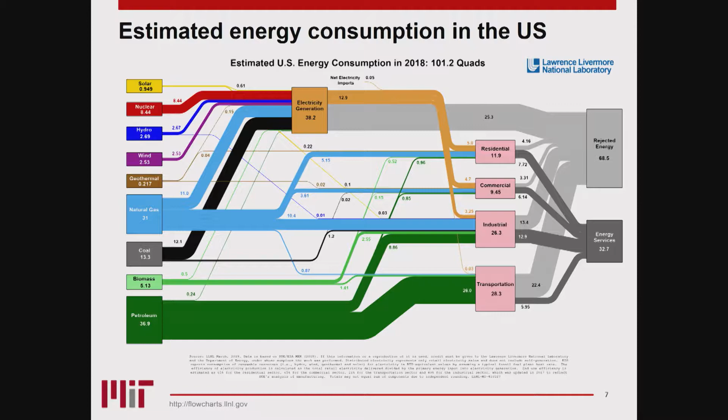I couldn't find one for the world, but if anybody knows of one, I'd be happy to put it into the presentation. How many people have seen a graph like this beforehand? Okay, a few people. So for those of you who haven't, you want to read this left to right. On the left-hand side here, you have your estimated energy consumption. These are energy resources, essentially where we harvest energy from.

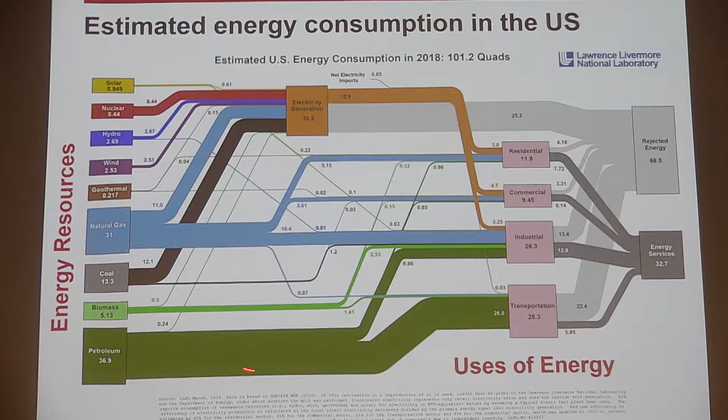And you can see on the bottom here, petroleum, biomass, coal, and natural gas. These are all sort of fossil fuel resources. And then geothermal, wind, hydro, nuclear, and solar we call more renewable type energy resources, right? And as you see the flow, the thickness of the arrow determines how much of that resource is going to a particular application.

And so in pink here, you have the uses for energy. So residential, powering homes, powering our businesses, so commercial and industrial, and then also powering transportation. So this is cars, trucks, and vehicles such as that. So these are the end uses of the energy.

And then the darker gray and the lighter gray represent the efficiency of the use. The darker gray here is energy services. That's energy that we actually use to produce useful work. And the energy in the light gray here is the energy that is rejected. That's energy that we lose in the transformation to heat or to some other losses, right?

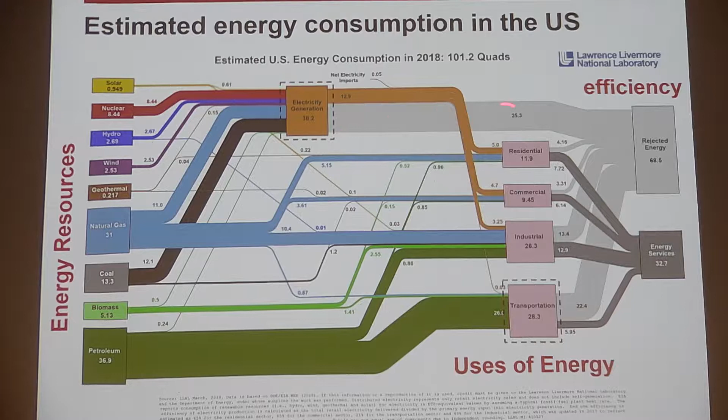So the important thing to take out of this, I think, is that, one, we still use a lot of fossil fuels here. These amounts of energy are significantly more than any of the renewables. The second is that particularly for things like electricity generation and transportation, so driving cars and trucks, you can see that a lot of our energy here and over here is rejected. Essentially, it's not a very efficient process. We're only able to use a fraction of the energy going in.

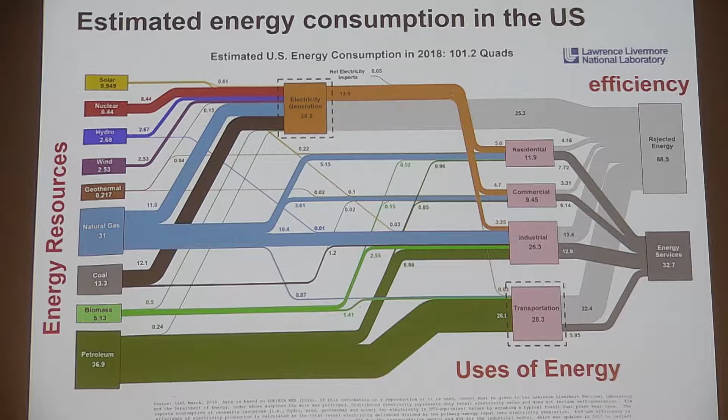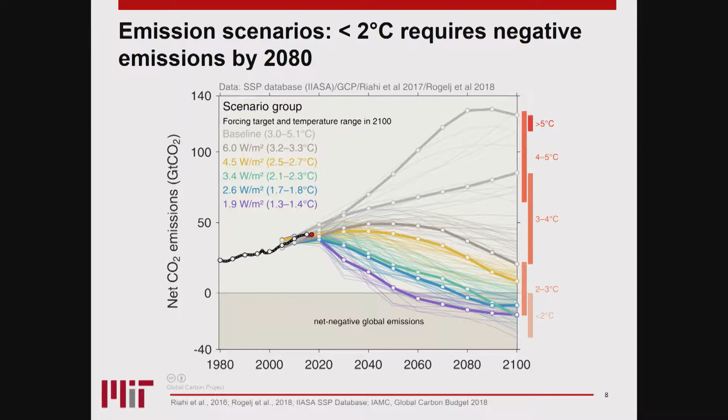And this then becomes a problem because if our energy use is not efficient, you need to use more energy to complete a particular task. And where this becomes an issue is when you start to think about emission scenarios with fossil fuels. Fossil fuels generate carbon dioxide, and the carbon dioxide, as it goes into the atmosphere, can then lead to changes in the global temperature.

And so these are now projections from the Global Carbon Project here. This is sort of when the data was taken. And these are projections for business as usual cases and sort of the increase in global temperature. And then opportunities for us to begin to reduce emissions to the point where we go net negative around about 2080 or something like that. So obviously these are very aggressive.

But you can notice for these kind of projections, in order for us to keep emission scenarios below 2 degrees, you're going to have to do some pretty drastic changes in the way we do business right now, including not just preventing net emissions, but then beginning to reduce it until we start to pull carbon dioxide out of the atmosphere. So these are fairly significant challenges that we're facing.

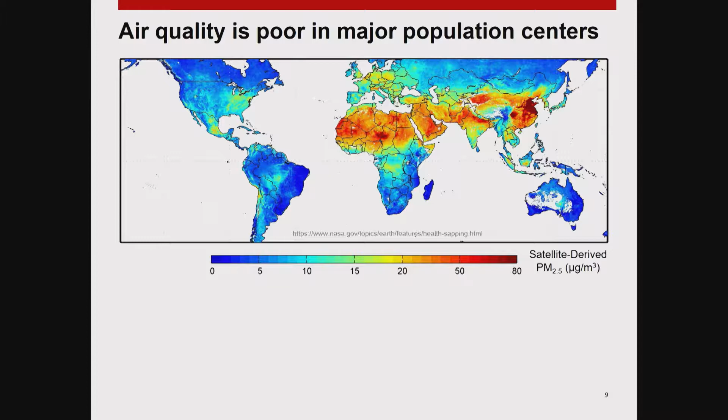And I'll put another challenge closer to you guys' heart, perhaps, is that if you live in a city, anytime you're combusting fossil fuels, you're pulling out CO2, but there's also a whole bunch of other stuff that comes out with it as well. And so air quality in population centers is actually a fairly significant problem. And so poor air quality becomes an issue as you have urbanization, people moving to the city, improvements in middle-class livelihoods.

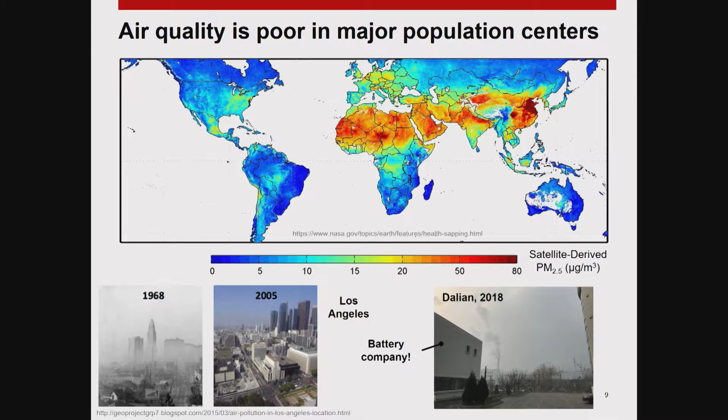And things are changing. The reason I'm in Dalian is I'm at a battery company. This is a battery company right here. And so they're working to address some of this smog right here. So we can see that the changes are coming around the world. And so I want to leave you with something today, if I can, is that it's all connected. So a lot of times when we think about energy storage, we think about a particular application, or we think about a particular type of energy storage. But everything is connected together.

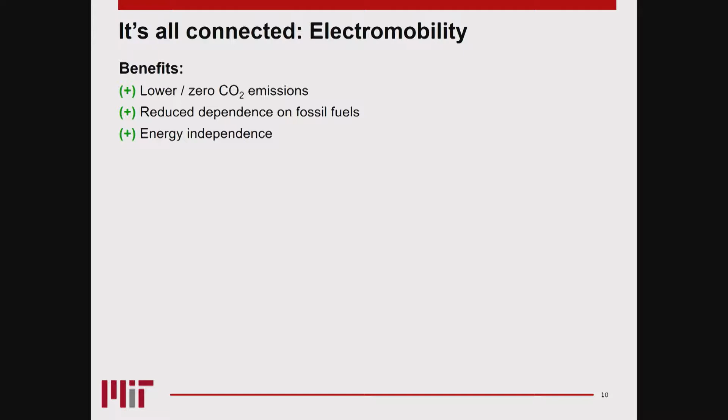And so, for example, if you consider electromobility, which would be electric cars, electric scooters, we think, oh, it'll lower CO2 emissions, we can reduce dependence on fossil fuels, and we can maybe achieve energy independence, not having to import fossil fuels from different countries. But it's all connected. So if you take this car, this Tesla right here, the Tesla gets electricity because you plug it into the wall.

Where does the electricity come from when we plug it into the wall? It comes from some generation source down the road. It could be a power plant. It could be a thermal power plant powered by natural gas, coal. It could be a nuclear power plant. It could be renewables. And so where this all comes from matters, because if I have electromobility with a car that doesn't emit CO2, but I've simply shifted those emissions upstream now to a power plant, I haven't gone anywhere. I've just moved where the emissions are coming from. And so that actually doesn't solve the problem.

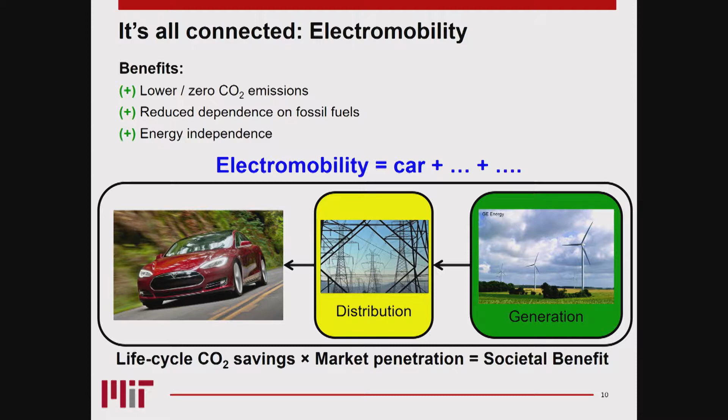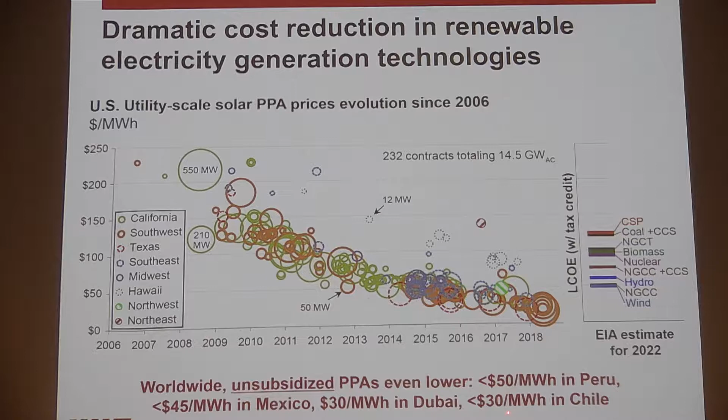And as you can imagine, worldwide, there's lots of places where solar makes sense. Sun-soaked places like Peru, Mexico, Dubai, and Chile all have very, very low costs of solar electricity. This is like 3 cents per kilowatt hour here. So very, very cheap, and we anticipate it getting even cheaper. OK, that sounds great. What's the problem? The problem is the variability. As you know, the sun rises and sets, and if I needed to turn on the lights at night, there's going to be no solar power available because the sun's gone down, right?

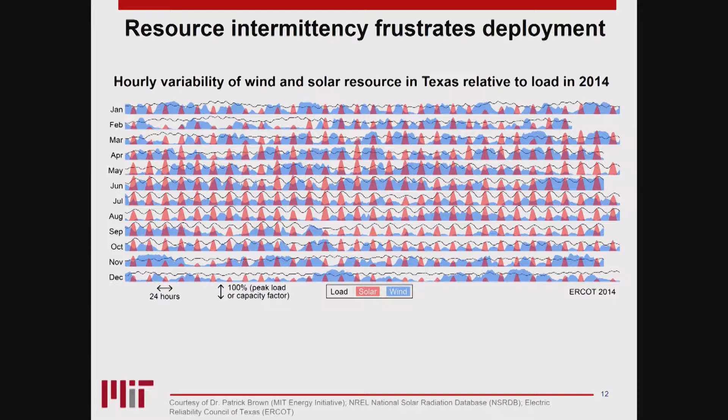It's a little bit more complicated than that, though. What I'm going to show you here is hourly variability of wind and solar resources in Texas. This is data from Dr. Patrick Brown at the MIT Energy Initiative. And this is data for an entire year, 2014, in Texas from the Electric Reliability Council of Texas, which covers the majority of the electricity consumption in Texas.

What you're looking at here is this black squiggly line that you can follow from month to month. That's the load, the amount of electricity being used by the system. And the red bumps here represent solar. Each of those bumps is a day, right? So you should see enough days for the month and enough days for the year. And the blue, say, amorphous blobs are wind availability, right?

So I want you to notice a couple of things here. One, of course, we can see in the days the sun rises and sets, and in some cases, let's say the 1st of January, there's just enough solar available to power the load, right? But in many cases, there's not. The second is that at nighttime, when we need to use electricity, there's no availability of solar, and sometimes there's no availability of wind. This is another example right here where for a couple of days, we don't have enough solar and enough wind to power ourselves.

You can also see that there are places, let's say this week here in February, where things are not looking so good for renewable generation. And you can even see here in December, this doesn't look so great either. And finally, you can see in the summer things look a bit better, but in the winters, things don't look as good.

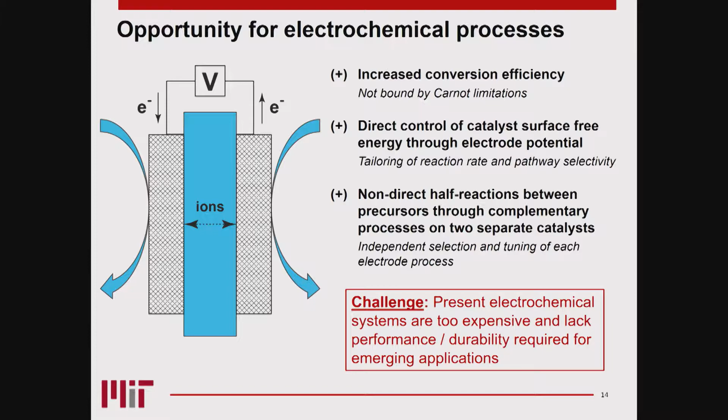I have direct control of the catalyst surface through basically modulating free energy by changing electrode potential, and I can independently specify the different electrode reactions. All of this gives me a nice tunable system with which to design new reactors and new performance. The problem is that these systems are too expensive and lack the performance and durability for many of the applications that I'm discussing with you today. A lot of you are very familiar with these kind of systems, and I'll talk about a couple of examples, but we'll get back to the fact that this is not what we want for tomorrow.

So for those of you who are interested, though, I told you that you don't necessarily need to be a chemical engineer to do this kind of stuff. For electrochemical processes to work, we need a diverse group of scientists and engineers because we need to synthesize and characterize new materials. We need to have good understanding of the thermodynamics of the process, of the reaction kinetics, how it actually operates, transport phenomena between the two electrodes, as well as reactor design and prototyping. So it requires a diverse skill set.

And for those of you who aren't interested in any of that, also things like estimation and approximation, modeling and simulation, process optimization, and engineering economics all play a very important role in effective system design. So you can imagine that it's very difficult for one person to know and be expert in all of these things. You need teams of people focused on these types of problems.

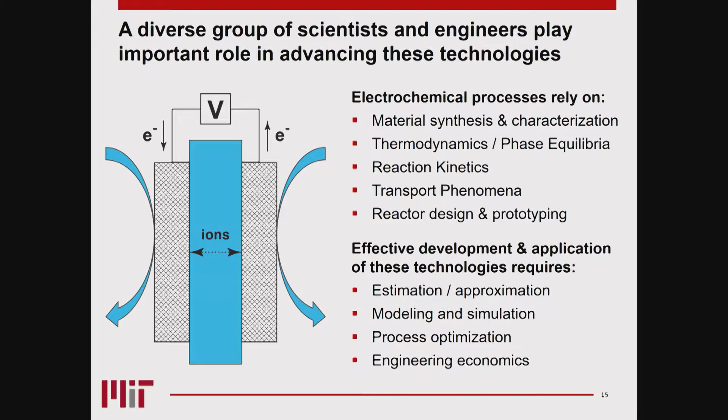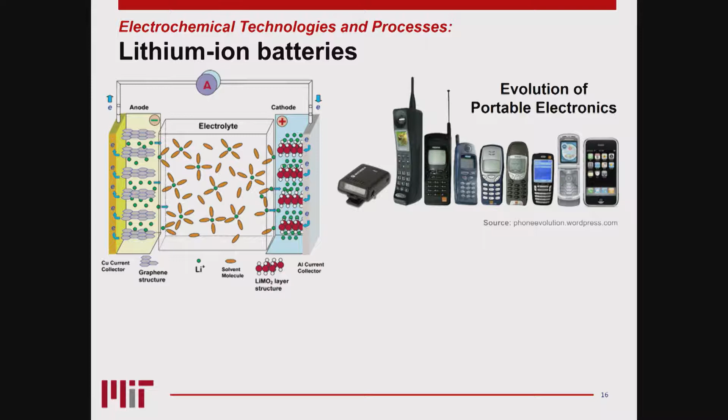All of that requires more power, which requires increasingly powerful batteries, increasingly powerful systems that we're working on today. Going beyond portable electronics, we want to be able to use lithium-ion batteries to power vehicles. This is an example of the Tesla that I showed you a bit earlier. And even to power and enable the renewable electricity to come on the grid, using batteries to prop up the intermittency of renewables, where you store electricity when you don't need it, and then you can deliver it onto the grid when you do need it.

So lithium-ion batteries are a core technology, and they're ones that hopefully you're familiar with, but there are many others that are equally important that you might be less familiar with. For example, anytime you're dealing with an aluminum can, say if you're drinking Coke, I don't necessarily like Coke, I'm fine with Pepsi too, I just found Coke first.

So those come from aluminum smelting plants, where you take bauxite and you reduce that to form metallic aluminum, and the metallic aluminum is what we use to design aluminum products. An important thing to realize is that this is a very energy-intensive process, which is why recycling is such an important part of aluminum. It costs a lot of energy to be able to make these types of systems.

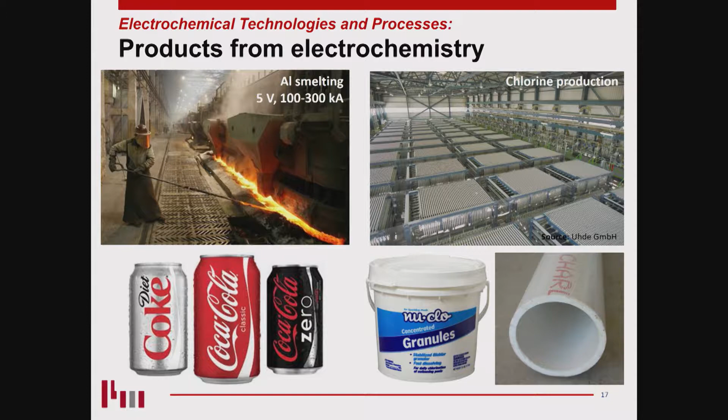Also, chlorine production. If you go to a pool, any sort of a pool has to have chlorine in it to keep it disinfected. And a lot of piping, this is PVC piping, involves chlorine. And that's also synthesized by an electrochemical process on an industrial scale.

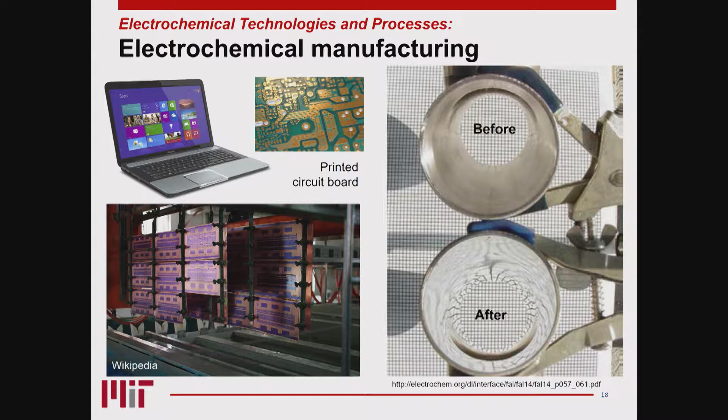Within your computer, it's not just your battery that requires electrochemistry. A lot of your printed circuit boards are printed via electrochemical methods. You're printing all of these circuit boards that will then go into this computer right here, as well as a lot of metal components here. This is electrochemical finishing, where this is the before system, and after electrochemical treatment, you can see it's significantly more shiny. So this is a way to finish products in different processes that can then be used in complex systems.

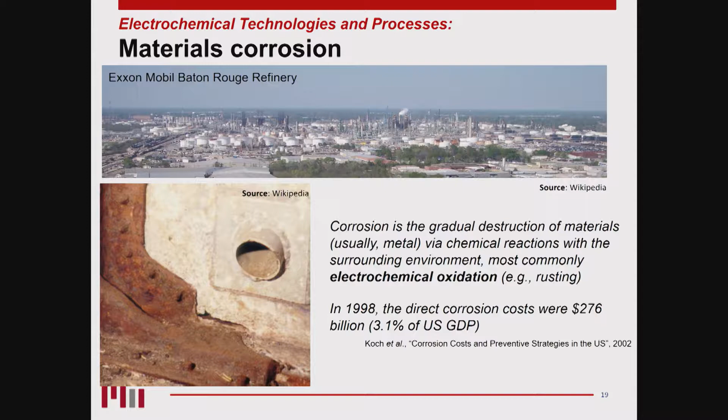And then finally, materials corrosion, which is essentially something that you don't want, but what happens over time is metal components, when they're exposed to the environment, will gradually oxidize, and this is how you, say, form rust. And rust leads to failure in these types of systems. So this is an example of the ExxonMobil Baton Rouge refinery. All of these components are metal.

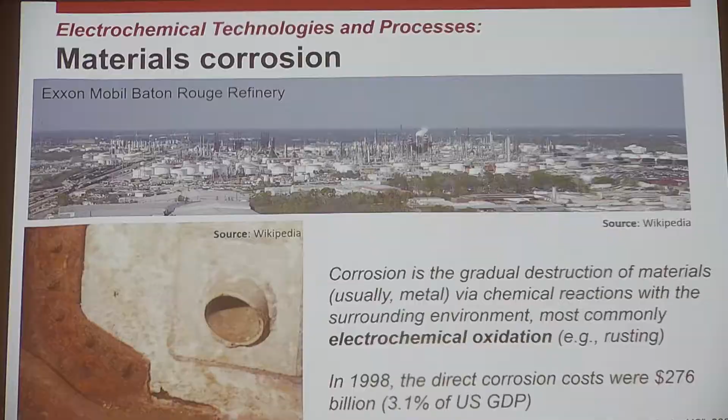They're really worried about corrosion, and this number is a little bit old, but corrosion was about 3.1% of US GDP in 1998, so obviously that number is going to be a lot higher right now. It's a big, big problem. If we could figure out ways to prevent corrosion, we would save a ton of money and improve energy efficiency quite a bit. So lots of things to think about here.

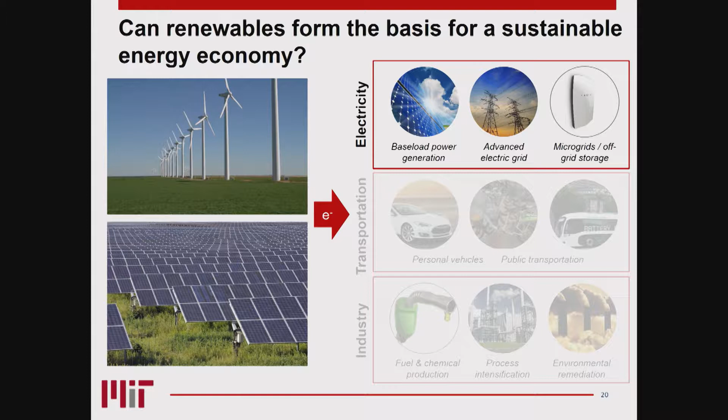So with the remaining time that I have here, 10 minutes, I want to give you a little example of some of the work that we do. And I start off by saying that for all of this to work, we need to be able to get renewable electricity and deliver it to the grid in a reliable fashion, for us to then enable transportation and also enable industrial applications. So what are we doing in this space?

So how many people know how we store electricity on the grid these days? Yes, over there. Spinning generators. Yes. That's one example, a spinning generator. It's called spinning reserve, and when you have voltage that's dropping off, the reserve kicks in and provides a little bit more punch. That's really useful for, say, sub-second to second type applications. That's right. Yes? That's exactly right. That's on the other side of the scale. So spinning reserve is for short-term issues. Hydroelectric and dams are for long-term applications.

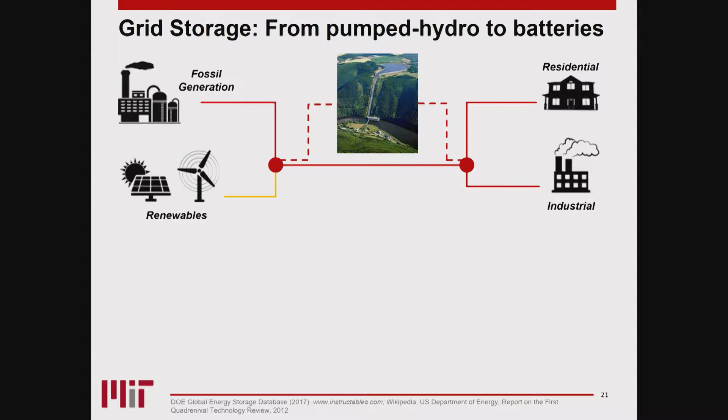So to give an example of the hydroelectric, essentially what hydroelectric is, you're storing water at two different elevations and taking advantage of the changes in potential and kinetic energy. So when I pump water uphill, I increase its potential energy. If I let it flow back down, that potential energy is converted to kinetic energy. That kinetic energy can then be used to power a turbine. That turbine can be used to generate electricity.

And so I use electricity to power the pump to go uphill, and then I let it flow back downhill, and I use the turbine to generate electricity. Right? This makes a lot of sense for a lot of different reasons. One is because water is a very, very cheap form of energy storage. We have a lot of water around.

And if you can take advantage of natural resources, so this is Lake Michigan here, this is in Ludington, Michigan, you can basically store energy in these pools that are slightly elevated from the lake and allow them to flow down through the generators right here, and this allows you to generate power. The nice thing about this is if I need to store more energy, I build a bigger pool. If I need more power, I build out another turbine. But you don't need to do both. It's one or the other.

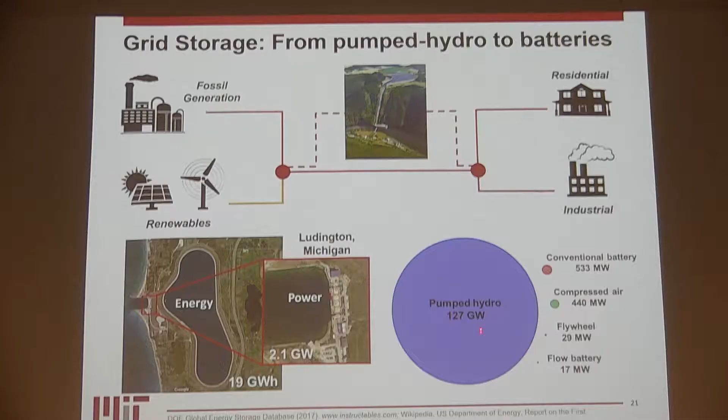So this is just an example of long-term energy storage. And as you can imagine, pumped hydro is the largest energy storage infrastructure that we have worldwide. The key example for spinning reserve is that you just don't store that much energy, right? So it's not really fair. Pumped hydro is huge, but spinning reserve is a very important component.

So the problem with pumped hydro, as I mentioned, is that you need to have water at two different elevations, and for it to be cheap, I need to have a large body of water. So the likelihood of us having pumped hydro in downtown Boston is zero. It's not happening, right? And so how do you get energy storage in a place where you don't have a water resource available, or how do you do energy storage when you don't have elevation available to you?

So when I was in Illinois, is anybody here from central Illinois? No. Okay, good. You can see the curvature of the Earth. It's that flat out there, so you're not going to necessarily get very much elevation.

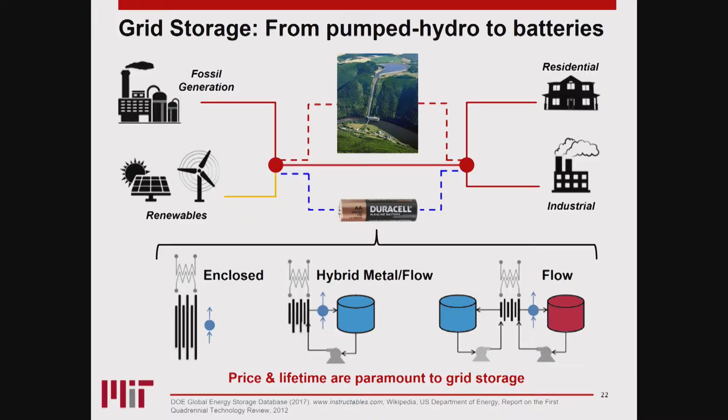So what we're trying to do here is to recreate a battery that would be very similar to pumped hydro in terms of its cost, but is going to be significantly more energy dense. And what I mean by energy density is I can store the same amount of energy but in a significantly smaller footprint. So rather than having to build out a big dam, I can have something that's small enough to, say, fit in the basement of a house. How would you be able to do that?

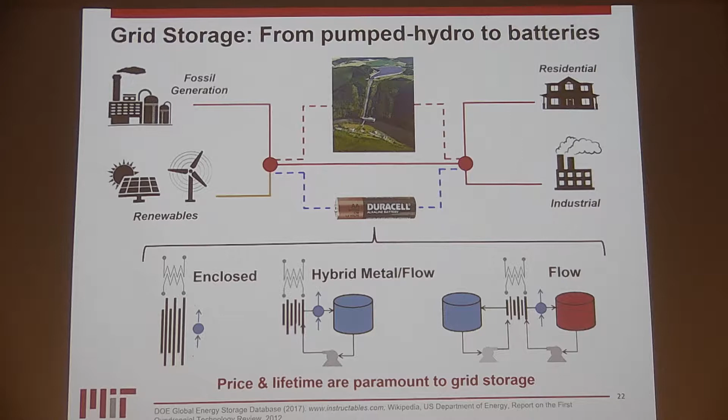And so there's lots of different battery modalities that we can look at, from things that look like lithium-ion batteries to things that look a little bit more like a chemical plant, which is what I'll talk about here for the next few minutes or so. So I'm very interested in flow batteries. How many people here know what a flow battery is? Good, a couple of people. So I'll give you a little bit of a primer here just to talk about why I think it's important.

So how a flow battery works is that you have energy storage materials that are stored in two separate tanks that are kept separate from a reactor. Within these tanks, you have an active species. This is what's actually storing energy. And it's dissolved in a supporting electrolyte in a solvent. So that could be something like sulfuric acid and water. To store energy, essentially, you are charging and discharging, taking advantage of changing redox states in these active materials to store and then to release energy.

How you actually do that is you take these materials and you pump them through an electrochemical reactor. This reactor looks a lot like a fuel cell to those that are familiar. To those that are not familiar, imagine that it's a series of plates that are laid on top of each other with some geometric design in here to allow for fluid distribution through an electrode, which I'll talk about in a second. In the middle of this reactor is a membrane. It keeps the two sides separate from one another.

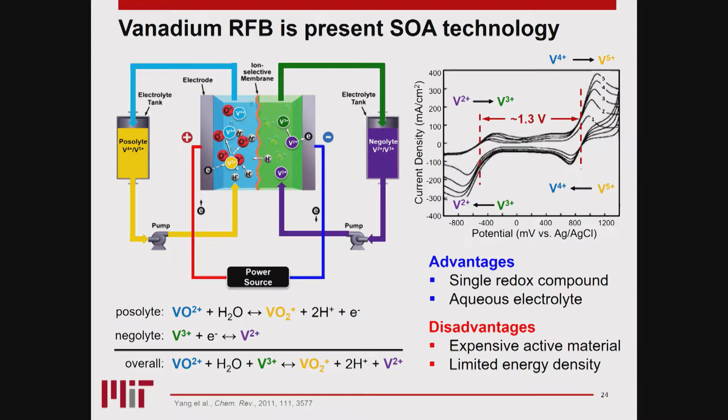So this is just a quick example of the state-of-the-art flow battery. So if you wanted to go out and buy one, you'd get a vanadium redox flow battery. This is a very nice system for a couple of different reasons. First of all, it relies on one material, vanadium, that has 4 stable oxidation states within the water window. And so on the low potential side, you have vanadium 2/3. On the high potential side, you have vanadium 4/5. And as you shift between these 2 states, that allows you to store and release energy.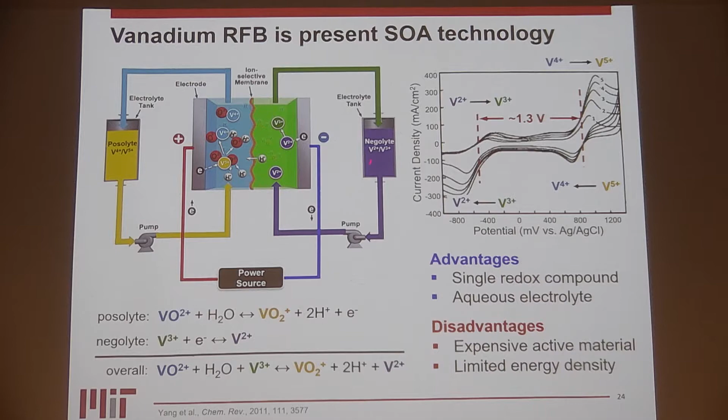Also, because you have the same material on both sides, if any of the material goes through the membrane right here, you can simply rebalance it because it's vanadium everywhere. We don't lose it. You can simply take some of the vanadium that's gone to the wrong side out of one tank and put it into the second tank right there. The challenge is that vanadium is relatively expensive and it has a limited energy density. And we can talk more about that in the Q&A session if you guys are interested.

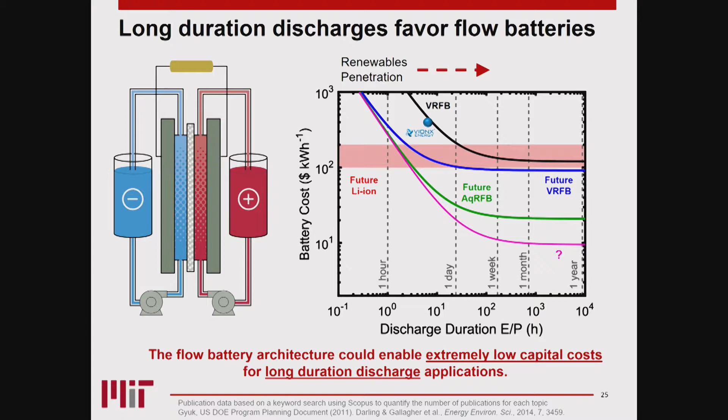So this is an example of a lithium-ion battery where you can say that if I need my battery to have a longer discharge duration, I actually don't gain any benefit. So essentially what I'm saying here is that for every lithium-ion battery that you put in, it's no cheaper to put in the next one. I'm simply having the same unit, I'm putting more and more units in there, and therefore if I want to discharge for an hour or a month, same price, because you're buying the same units, you're just buying more of them, right?

However, if you can separate power and energy, essentially what happens is at some point in time you say, well, if I just want to get more discharge duration, I need another tank. That's all I'm saying here. And so I don't need to have another reactor. I can simply buy another tank or buy a bigger tank. And that's why you see the cost essentially plateau as you're asymptotically approaching the cost of the energy storage material within that tank. And that's why something like vanadium, because it's expensive, matters, because at some point in time, you have to pay for the vanadium.

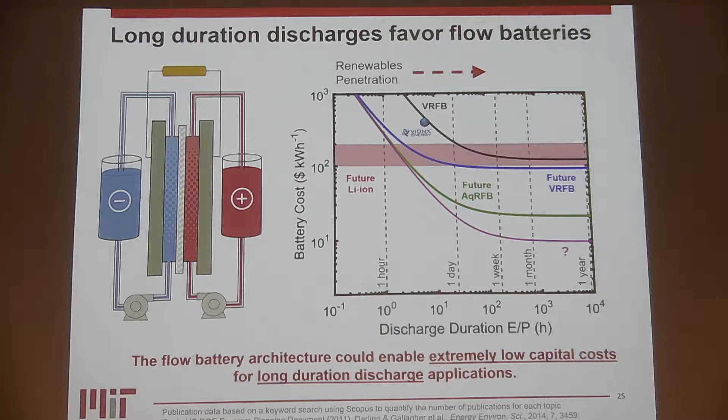You're not going to get any lower. And that's why we're always looking for new materials that are cheaper than vanadium that can allow us to get to lower costs for longer duration applications. And so much of the research that you'll find in this area is trying to figure out how do we develop new technologies. It's a very nascent field. There's only been a few publications in the area so far.

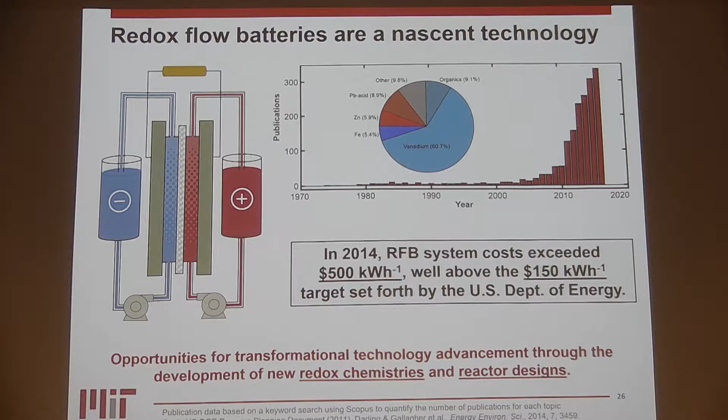And also thinking a lot about how do we go from about $500 per kilowatt hour to about $150 per kilowatt hour, so bring the cost down threefold. That's the big challenge for us because that's where we think we need to be competitive so the cost of your electricity doesn't jump up all of a sudden from, say, 6 cents all the way up to 20 cents. Then nobody's going to do it.

And so I'll leave you sort of with where people are going with this field. A lot of people are very interested in going away from transition metal salts such as vanadium to things that are organics or polymerics that can be synthesized more easily and more greenly. Going away from acidic aqueous solutions that are very corrosive to systems that are non-aqueous or systems that are neutral pH that can give us either more energy density or give us safer operation.

Going away from expensive membranes to size-selective membranes that look a little bit like your coffee filter in the morning, if any of you drink coffee. So a very similar principle there. And also going away from cell design, so flow fields that look a lot more like fuel cells, which are an adjacent technology, to systems that are better designed for this particular application.

And so hopefully I've convinced you that there's a lot that we can do in this area. We're still looking to figure out what success looks like. There are different pathways to approach it, but there's a lot of promise here, and I think that this is going to be an important technology for enabling dispatchable renewable electricity.

So with that, I'll leave you with a few conclusions, and then we can have a little bit of a discussion here. Grid energy storage is going to be critical to enabling more sustainable energy systems, right? As I said, grid energy storage is the first domino. Once you can get dispatchable renewables, a lot of other things are enabled.

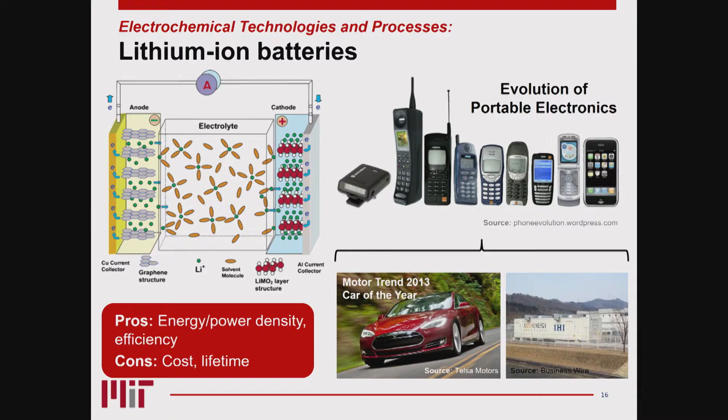Now, this inefficiency is very, very small. It's like 99.99% efficient. But over time, that begins to add up. So you can imagine each cycle, say 99.99 times 99.99 times 99.99. Eventually, you're doing 0.99 to the nth power, right? At some point in time, you start to lose capacity because you lose too much of that lithium inventory. That's what eventually causes it to degrade, is these subtle inefficiencies.

And so if you went to, say, a research facility for Samsung or a research facility for Sony, they're spending millions of dollars trying to figure out ways to improve the efficiency of the battery to 99.999. Right? Because that matters a whole lot to them. And so a lot of that is around different additives in the electrolyte, different electrode formulations that make it more and more efficient. So that's eventually why it breaks down. And over time, the more and more you cycle it, the quicker and quicker it begins to break down. Does that make sense?

Over here, just because I can see you. Yeah. Oh, so the question is, how exactly does the movement of lithium ions provide power? So essentially, when you have a chemical reaction, you usually have a Gibbs free energy, which is the free energy available for that reaction. If it's a spontaneous reaction, that energy is negative. If it's a non-spontaneous reaction, that energy is positive. That change in energy is what gives you power, right?